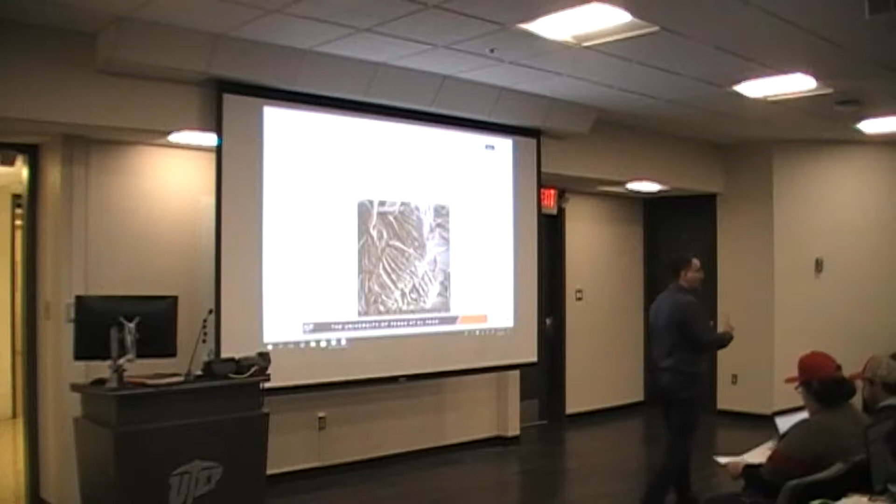As I mentioned in our first lecture, the first 4 topics that we're going to talk about are very applicable in the industry, but very intuitive. If you don't understand this or have this present in your mind before we move forward to topic number 5 and later on, you'll get lost. In fact, I remember several students joking with me that the level of complexity or the challenge of the course starts like this and then goes nosebleed. So you have to be careful with that.

So you have to be very careful with the definitions. A lot of times you might sit in the class and say, well, I understood what's going on, so I probably will be in good shape. But if you don't revisit the material, it's going to be problematic.

Now that we're talking about this and we have some time, let's talk about this as well. At this point, you guys are all professional students. You probably sat behind those desks for over 15 years at least, right? So what happens in retention, this is the theory of education that might be useful. It would be interesting to think about this when you're looking at reading the material.

You typically have about 6 hours from the time of your first exposure to the material to the review. If you don't review the material within 6 hours and come back to look at it 2 weeks afterwards, it's all new material. There should be a connection between short-term memory and long-term memory. You need that 6 hours. I'm sure all of you are extremely smart people, but this is the way the brain works. You have to establish those mental connections. If you don't revisit the material within 6 hours, you will not remember it. That's how the human evolutionary mind works, right?

So let's keep that on the side, but let's move forward with what we're talking about in terms of soil. All right, so we have coarse grain material and fine grain material. We'll look at sieve number 200, and we look at materials that are smaller than 75 microns and larger than 75 microns, right?

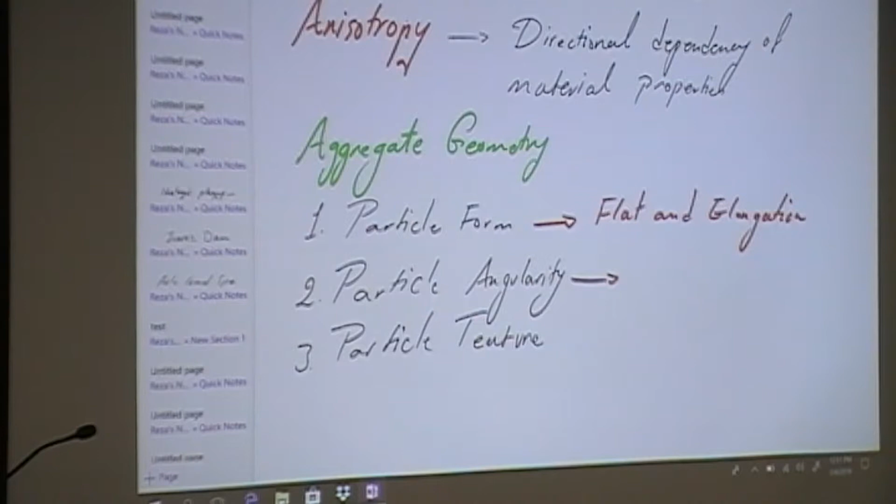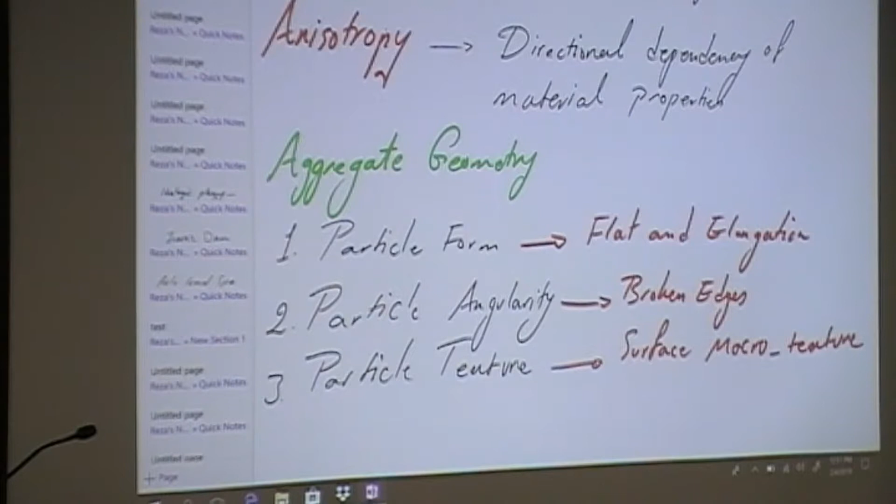Let me just quickly define these and talk about how they are going to influence the behavior. Particle angularity has to do with the broken edges of the particles. And particle texture has to do with surface macro texture. All right, so let's define and talk about each of these and see how they are related to the stiffness properties.

Hopefully for the last time, tell me, what is the load distribution capacity, or what is the load transfer mechanism in soils? Through friction and interlocking effect. So keep that in mind. We want to basically tie that concept to what we have on the slide. All right, so we are looking at the particle geometry.

The first one is called particle form, which has to do with the aspect ratio of the particles. In very simple terms, I want to see what is the aspect ratio, meaning the length over the height. So we are basically looking at flat and elongated particles as opposed to equidimensional particles. Think about it another way: spherical particles or cubical particles are equidimensional, as opposed to very flat particles.

Let's take a look at two systems together, which would be more understandable to describe in terms of behavior. System 1 consists of flat and elongated particles. The second system consists of equidimensional particles, square in 2 dimensions, cubical in 3 dimensions. Let's call this one system number 1 and this one system number 2.

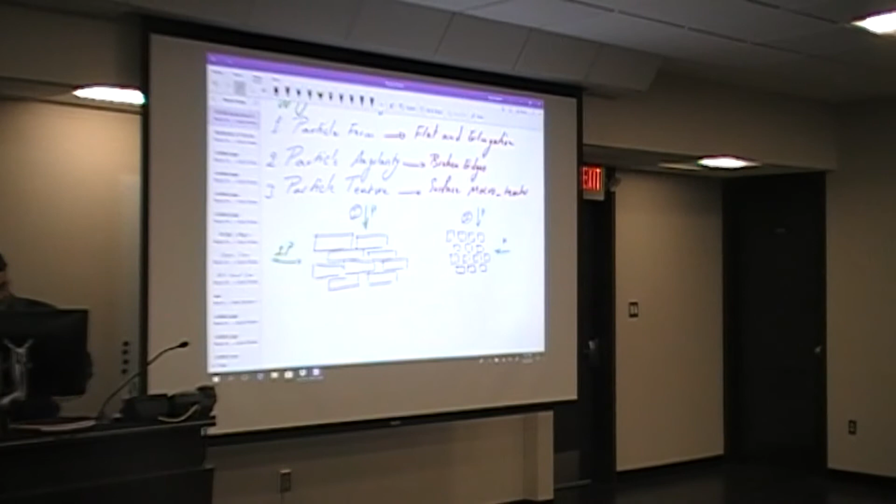Let's assume I have a siliceous gravel sourced from a riverbed, and you have crushed granite sourced from Virginia. The reason I put Virginia is that they have very good quarries with good quality granite material. Unfortunately, we don't have much of that here in Texas. And then we have siliceous gravel sourced from the riverbed.

Angularity has to do with the broken edges of the particles. Which of these two systems provides better interlocking? The crushed one, right? So you need crushed materials to provide good interaction between the solid grains to improve the stiffness properties. Anything we talk about here, you have to see how it relates to friction and interlocking—try to draw parallels with stiffness, interlocking, locking together, and providing good friction. So this was particle angularity.

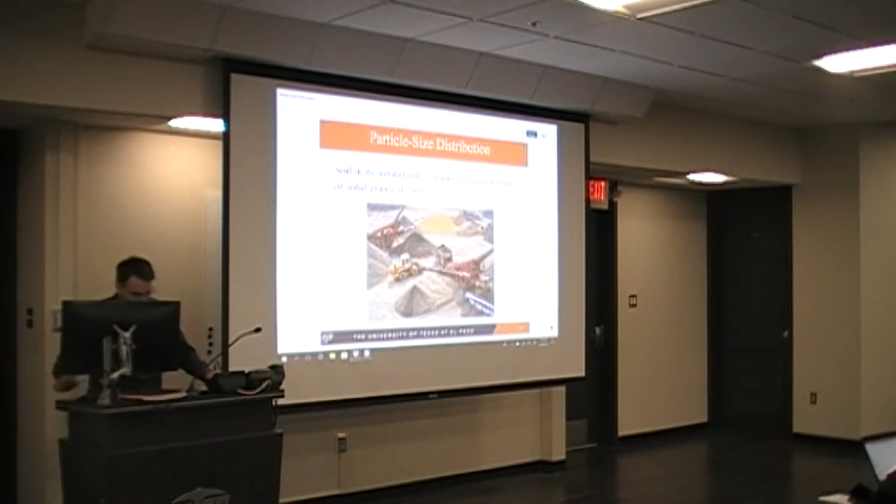Let's move forward and talk about our lecture slides. We can move quickly—I'll post these lectures after class so you have access to them. We're going to quickly go over some of the materials we've discussed and see how we can characterize the gradations, moving forward to see how they look in terms of gradation distributions and their contribution to stiffness properties.

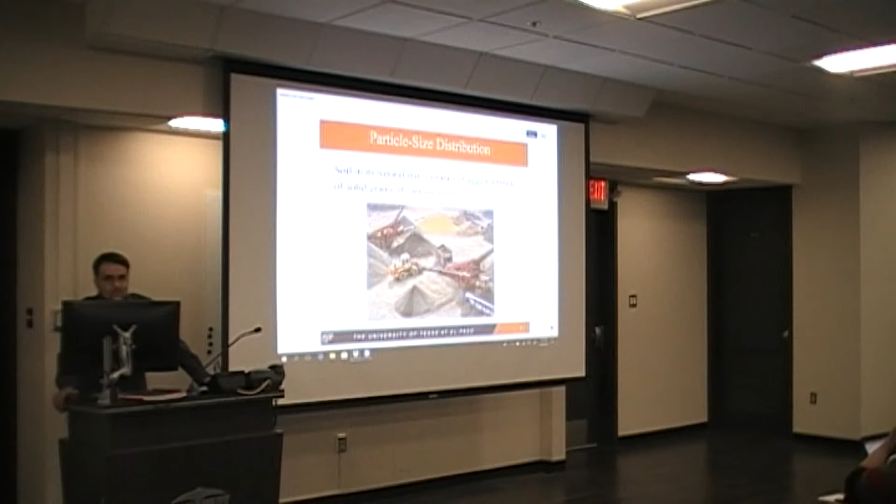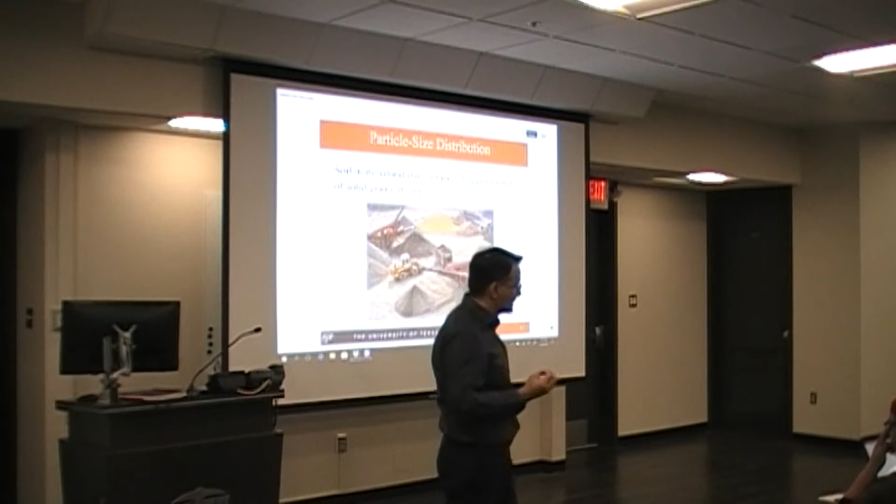All right, remember we talked about soil texture. Soil texture in very simple terms was how it feels when you hold it in your hand. Once you hold the soil in your hand, the things that come to mind are particle size, the assortment of particles—small, intermediate, and large ones—and ultimately the shape of the particles, like if it's a siliceous gravel, rounded ones as opposed to crushed ones.

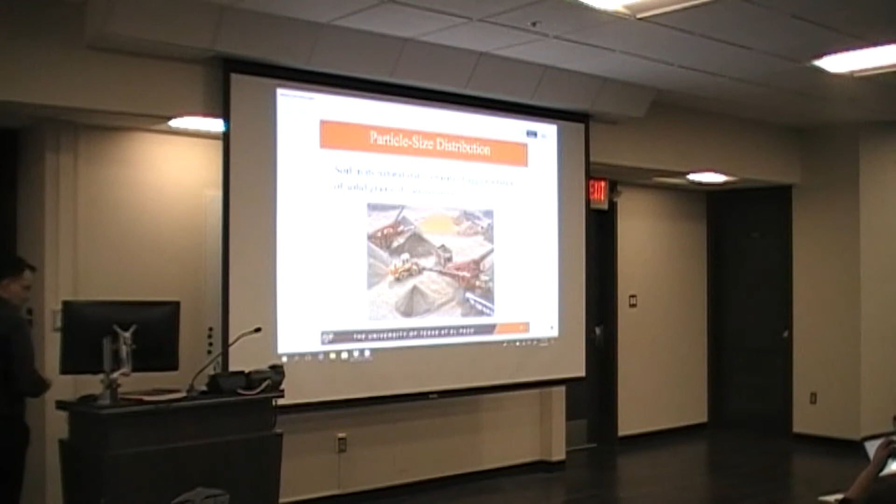Thinking about that, all Federal Highway and TxDOT, or any Department of Transportation, will not allow you to use materials that are rounded for load-bearing layers unless you do some sort of mixing and convince your state supervisors that you can use that. But essentially, it's not a good idea to do.

In terms of the qualitative look at the particles, you can have rounded, sub-rounded, and crushed aggregates. As we talked about, we are interested in materials that are crushed because they provide a good interlocking effect and the whole jazz. All right, let's go back to grain size and the definitions of that.

We are looking at fine grain soils and coarse grain soils. We talked about the important sieves. The first sieve you have to look at would be sieve number 200. The particle size associated with that would be 75 microns. On the other side, if you're looking at coarse grain material, you basically have gravel and sandy material, and the sieve that separates the two is sieve number 4, or 4.75.

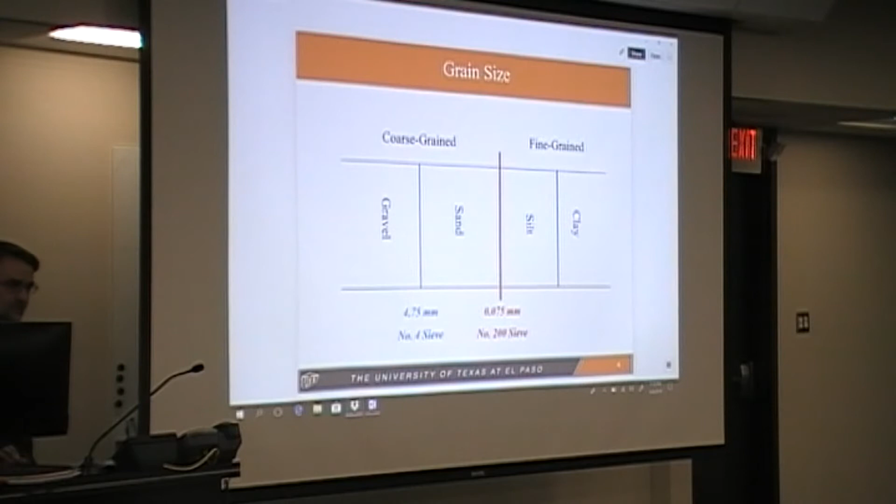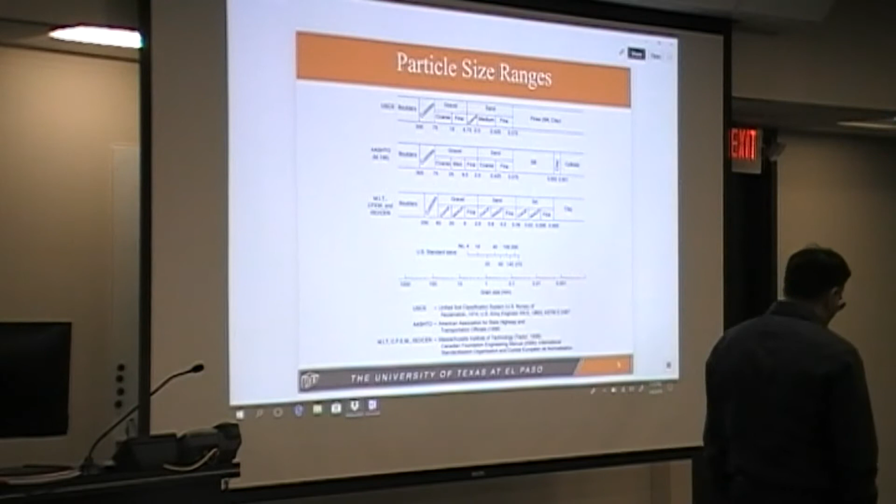This is based on the Unified Soil Classification System, USCS. We have different ways to classify soils, and these are the different types that we have. The first one is USCS, and probably if you start working in the field, 95% of the time that would be the one you're talking about.

The other one would be the AASHTO soil classification. If you work in the pavement industry, or in airfield and runway industry, you basically will also have to be fairly familiar with AASHTO classifications.

The third one is the MIT one, from Dr. Whitman and Lambe's book. The last publication of their very good book was in 1979. Probably a lot of people in this room were not even born at that time, but it's a very good book. It's out of print, but they call it the MIT classification. Even the MIT folks don't use that anymore, so it's good there just for reference.

So the main ones that we look at are USCS, the Unified Soil Classification System, and the AASHTO Soil Classification System. Once we start talking about classifications, hopefully in 3 lectures from now, we're going to revisit this plot again. But let's take a look at the differences between USCS and AASHTO. Remember, we are looking at coarse grain and fine grain. For fine grain, we look at silt and clay, and for coarse grain, we look at gravel and sand. You do have larger particles, as you can see there—pebbles and boulders—but let's put them aside.

Notice that for the case of USCS, we don't have any distinction between silt and clay. Anything smaller than 75 microns, we just call silt and clay. Later on, we have other tests to differentiate, but here we are basically looking at anything smaller than 75 microns and calling it silt and clay, associated with USCS. On the other side, for the AASHTO soil classification system, you see there's a distinction between them.

All right, so these are essentially the particle ranges that we have in the USCS and AASHTO soil classification systems. Let's quickly go through the definitions together. You're familiar with this, we went through that, but it would be good to look at them a little bit more in an organized way.

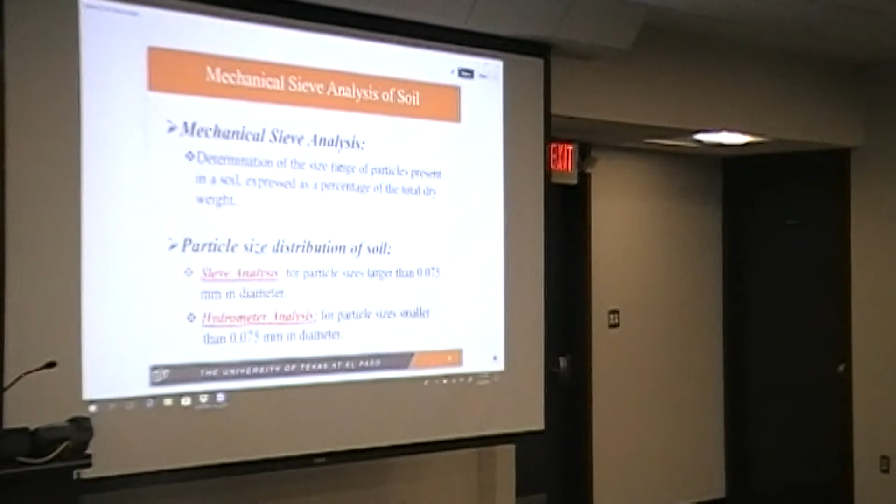We are looking at the mechanical sieve analysis. It essentially has to do with the determination of the particle ranges, expressed as a percentage of the total dry weight. Sieve analysis relates to the coarse grain material. You're familiar with how we do it - remember, large particles go progressively smaller and smaller in the stack, and then you mechanically shake it and measure the weight retained on each of those sieves.

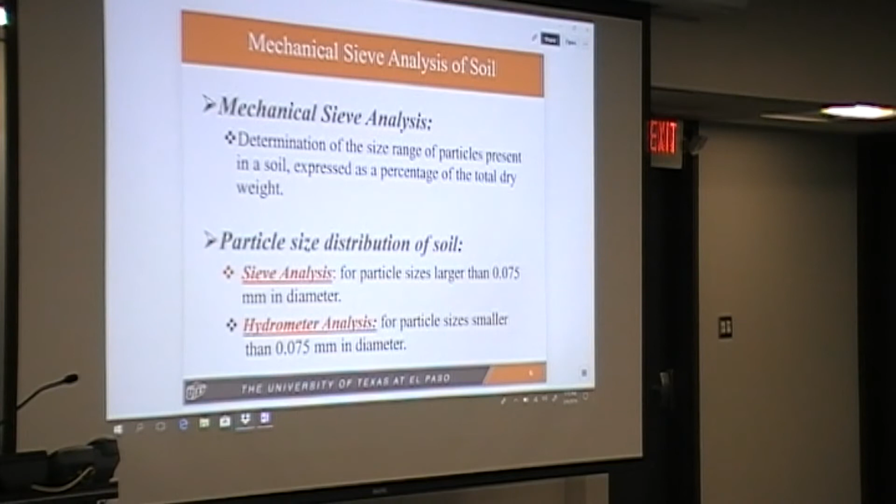And then we have the hydrometer test, which is the test that we use for fine grain soils. This is going to be the subject of your second one. We're going to talk about that hopefully in a second. But let's quickly take a look at what we have here.

For engineering purposes, we categorize soils into coarse grain and fine grain. Under coarse grain would be gravel and sand; on the fine grain, it would be silt and clay. Depending on the classification system you look at, you can put silt and clay under the same umbrella, or you can separate them. The separation was in the AASHTO soil classification system, which has specific ranges.

What do we need in our particle size distribution? You need to know the weight retained on each sieve, and you need to know the particle diameter. Remember we had gradation curves - what did we have on the y-axis? Percent passing, right? What did we have on the x-axis? Log diameter. That's extremely important, it's a log of diameter.

The reason that's important is when you start determining the gradation parameters, you have to figure out what the particle size is smaller than 10%, 30%, and 60% of the soils, as inputs to the equations. Since it's not arithmetic, you have to be careful about the size you select there.

We'll get to that. All right, in terms of particle size analysis, we do it in three ways. Essentially for coarse gradations, you're looking at mechanical sieve analysis. For fine grain soils, you can either use the hydrometer test or the laser scattering particle size analyzer.

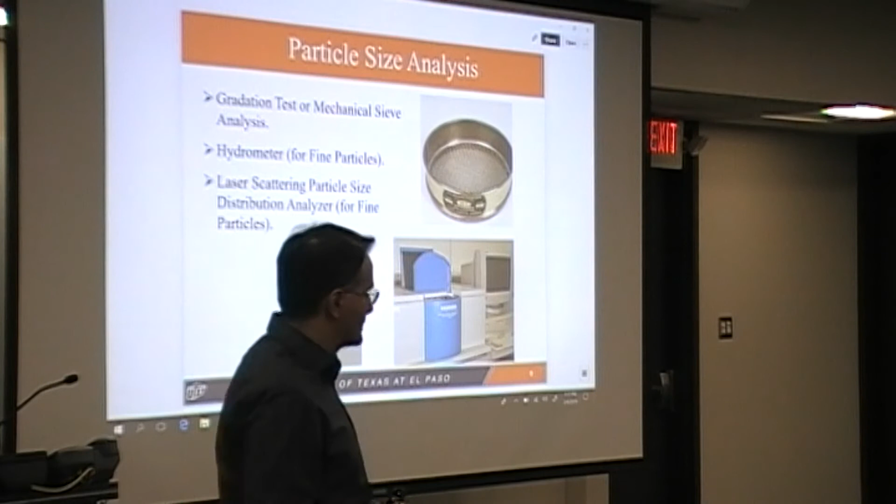So that's something that for us is going to be working there in terms of the particle sizes. All right, so let's quickly move forward with the sieve analysis.

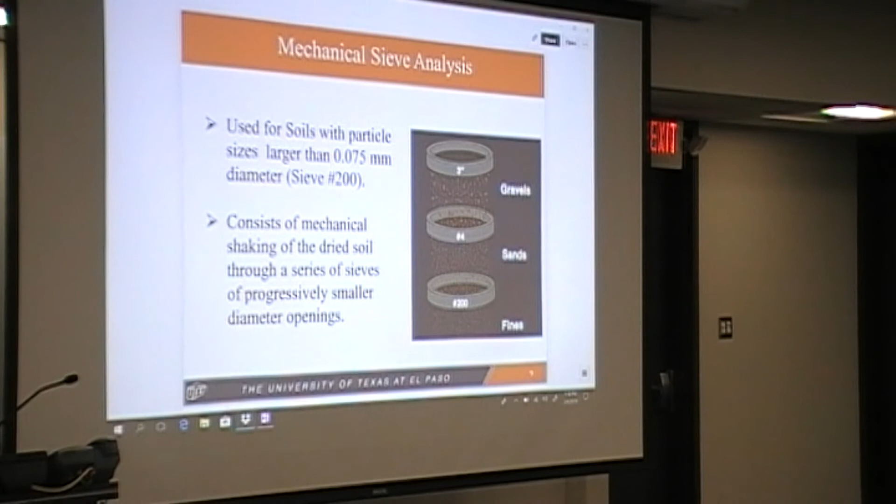You're familiar with this. Again, quickly, we're looking at 3 major sieves. Remember sieve number 3, or the number 3-inch sieve, that basically would be the line in the sand between the gravels and the cobbles that we have. And then between number 4 and number 3, that would be the gravelly material. Between sieve number 200 and sieve number 4, you had the sandy material, and anything that passes sieve number 200, we call them fines.

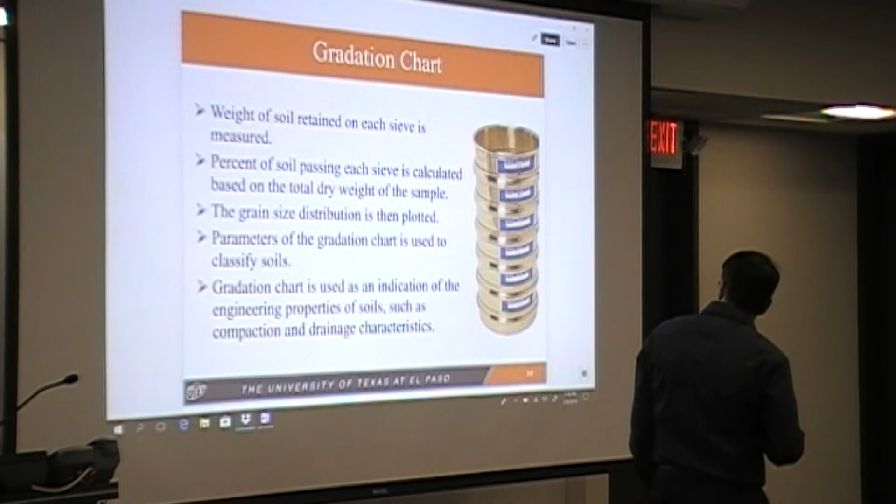Again, this is another way to look at the distinction or definition that we have. You're basically looking at weighing the soil that is retained on each of these sieves. The larger sieves are stacked at the top, and as you go down the stack, you see that the sieves are becoming smaller and smaller. So specifically for this one, for those of you sitting at the very back, it's sieve number 10, 20, 40, 50, this looks like 80 or 90, and the last one would be 200.

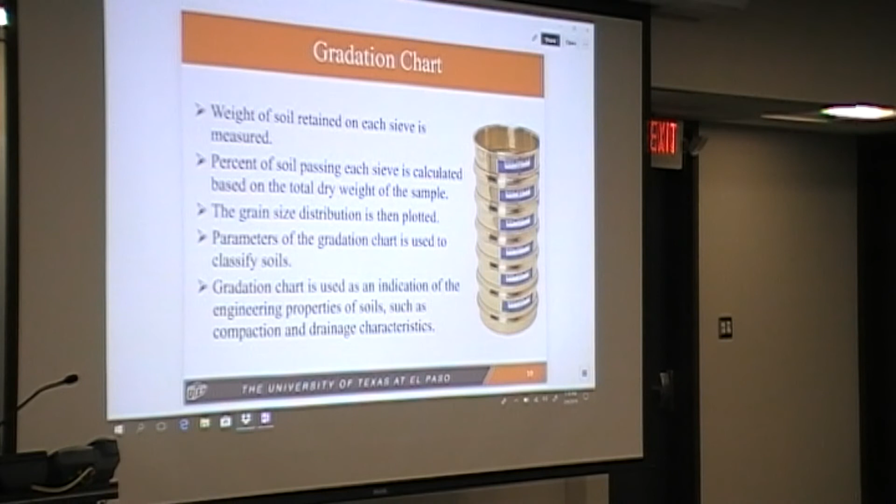Typically for highway applications and foundation applications, we are looking at materials smaller than 2 inches in diameter and going all the way down. So typically you might put in a sieve that corresponds to 1.5 inch at the top.

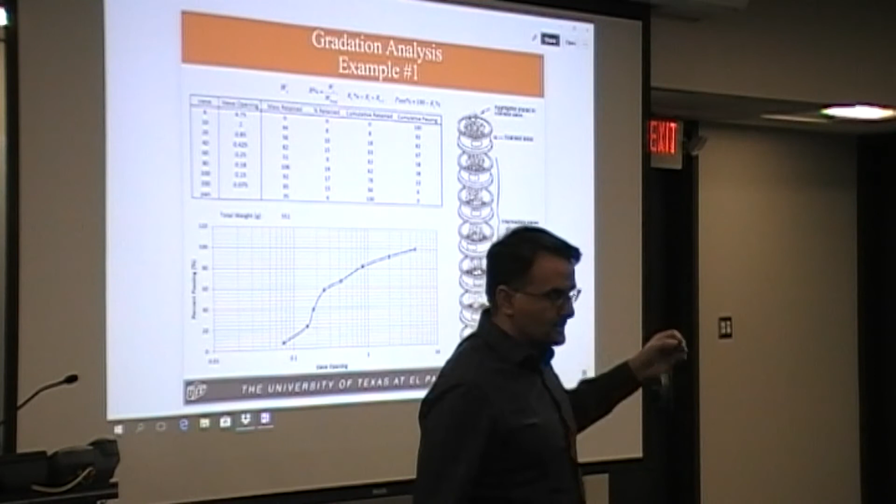All right, so all we talked about, it basically boils down to this plot. Remember we are essentially mechanically shaking the sieves and measuring the weight on each of these sieves. And this is the table or the Excel spreadsheet that you have to set up for your sieve analysis.

The first column and second column are repeating itself, so these are constant. The first one is sieve size, depending what sieve you have at the very top. Here we have sieve number 4 all the way to sieve number 200, and the last one is the pan, essentially when we collect the P200 material. The second column is sieve opening. You can read it right by the sieve, or you can also calculate that, but these are all given. That basically gives you the particle diameter that you want.

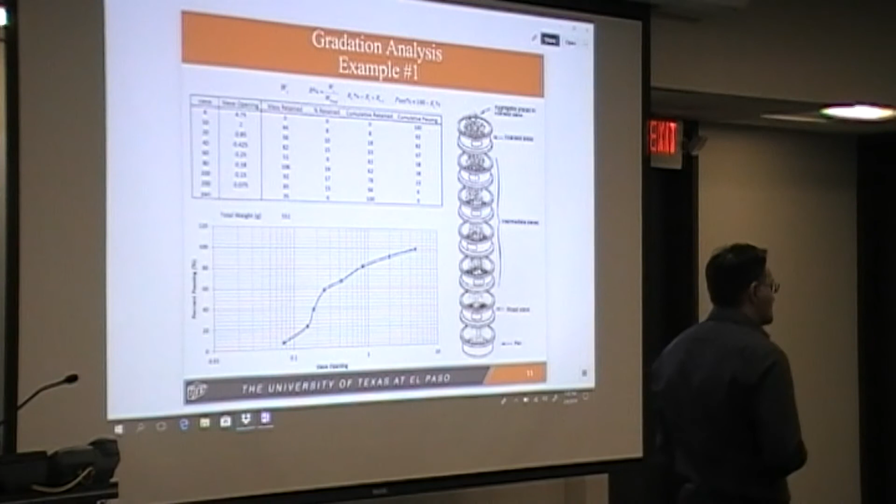The third column is the column that you basically have to do the measurements of weight on each of these sieves and record it in this table. So the one that you basically have to populate here would be column number 3. The rest of it is just basically calculations based on it.

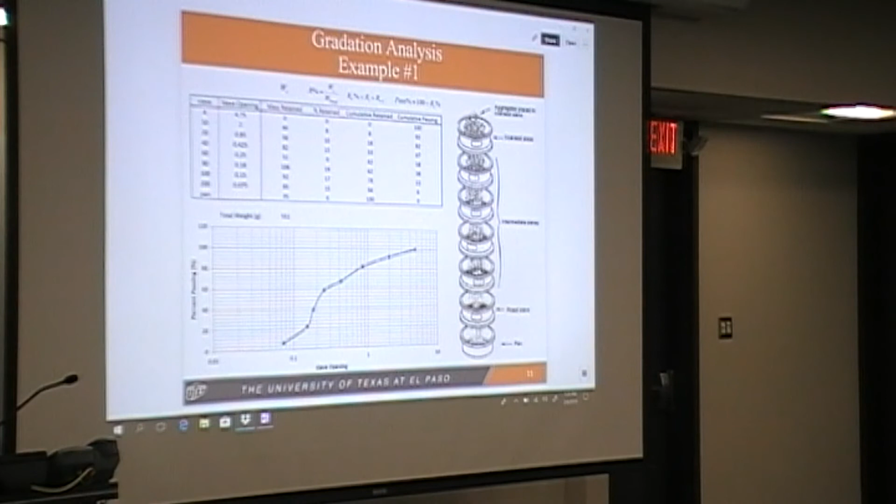Column number 3 is mass retained. What does that mean? It means that now I measured the weight that retained on each of these sieves. This means that 44 grams retained on sieve number 10, 106 on sieve number 80, 85 grams on sieve number 200. That's basically what it means.

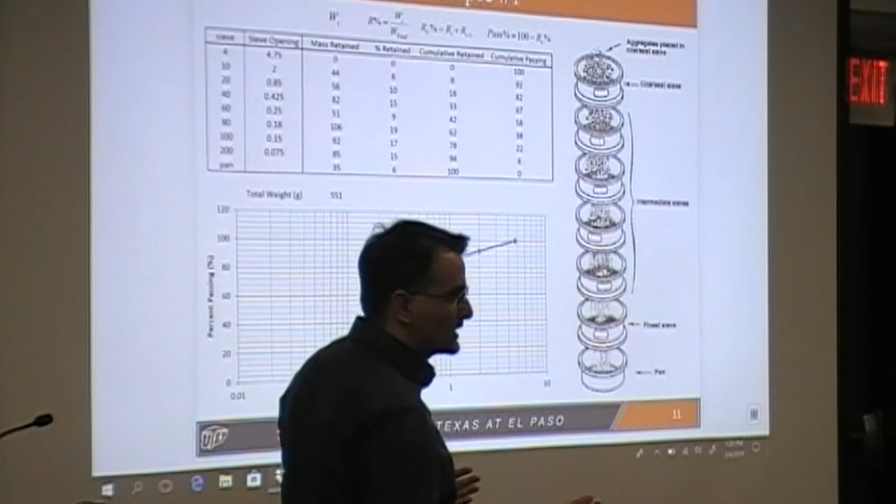And then what you have to do is essentially use the SUM function in your Excel spreadsheet, and just do the calculation and sum all these cells that you have. So total would be 551 grams of soils, that would be the summation of what I have here. The next column would be percent retained, which is basically this weight divided by the total weight that I have. So for instance here it would be 44 divided by 551, that would be 8%. That's basically what it means.

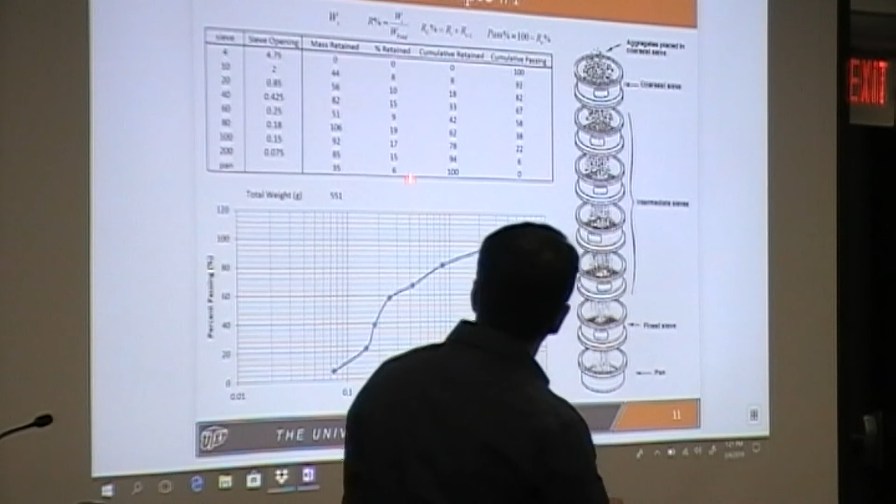And you basically move forward all the way down. Then you have the fifth column, looking at cumulative retained. So what this means is that you have 0 here, 0 plus 8 would be 8, 8 plus 10 would be 18, 18 plus 15 would be 33. So basically you're looking at percent retained on that specific sieve.

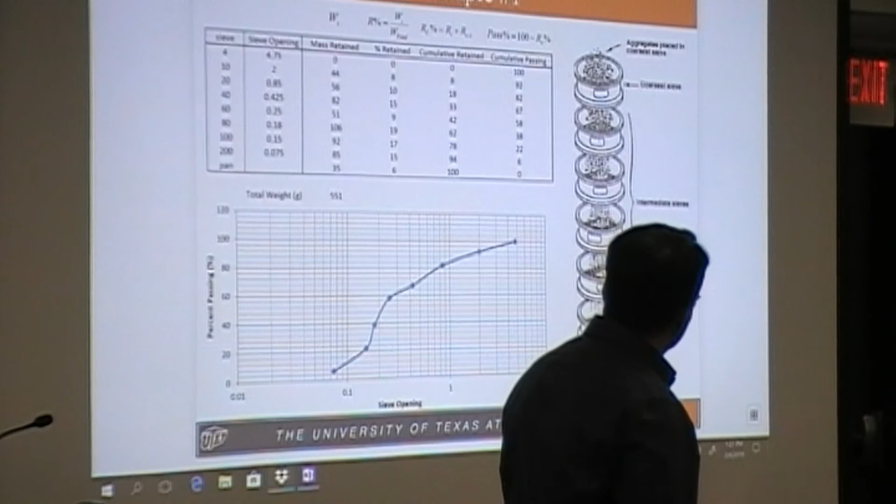The last one would be very simple and straightforward. That would be the cumulative passing, which would be 100% minus what you had in this cell. I specifically put these equations for you there so you can set up your Excel spreadsheet easily and essentially plot it.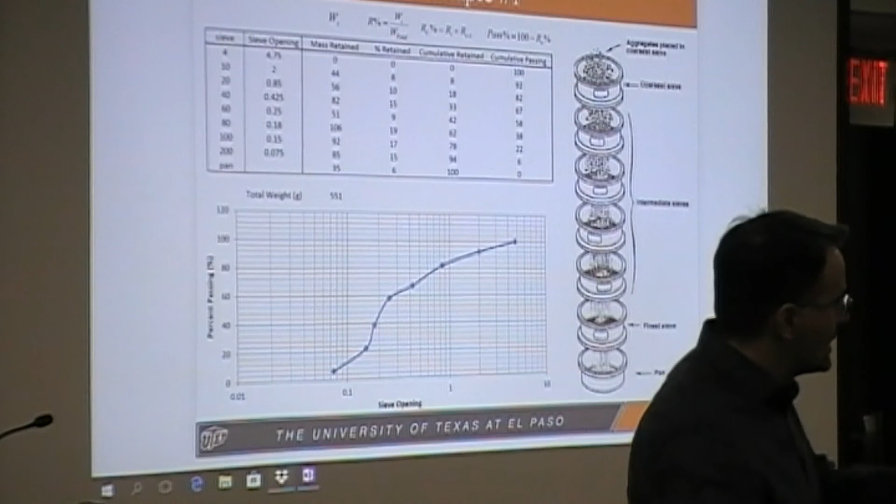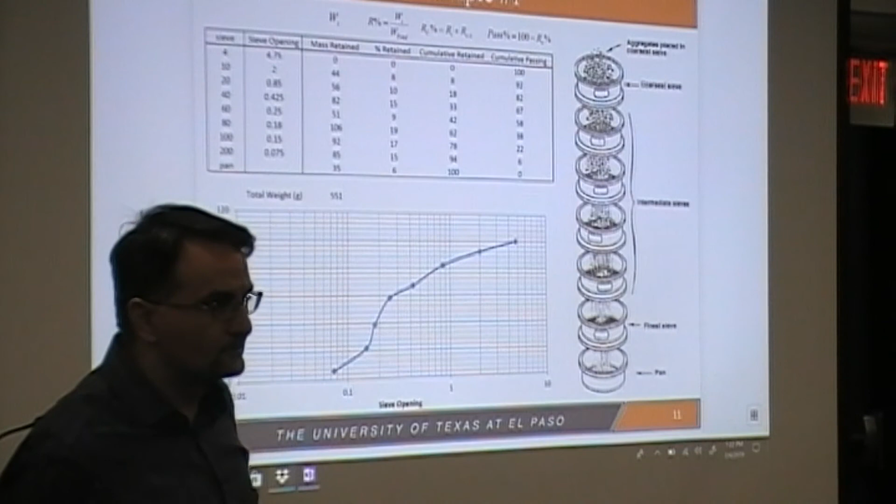So, what was my gradation curve? I had percent passing on the y-axis, and I had log of diameter. So this is in log scale and this is in arithmetic scale, and this is essentially what you end up with. So that would be your gradation curve. Is it clear what we have here? Very simple and straightforward in terms of how.